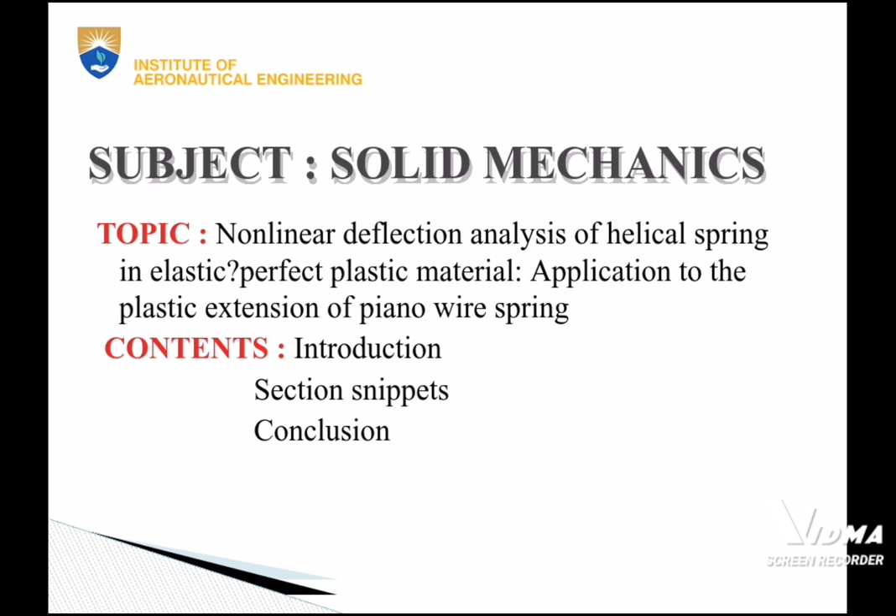2295580314. My tech talk is based on solid mechanics and my topic is non-linear deflection analysis of helical springs in elastic-perfect plastic materials: application to plastic extensions of piano wire springs. Introduction.

Flexibility is sometimes needed, and the springs are designed to fit the designer's needs for carrying load with elastic deflection displacement. The slope of the linear load-deflection relation is given by the conventional formula for spring constant k equals G d^4 / 8 D^3 n, where small d and capital D are wire and coil diameters, n the number of turns, G the shear modulus.

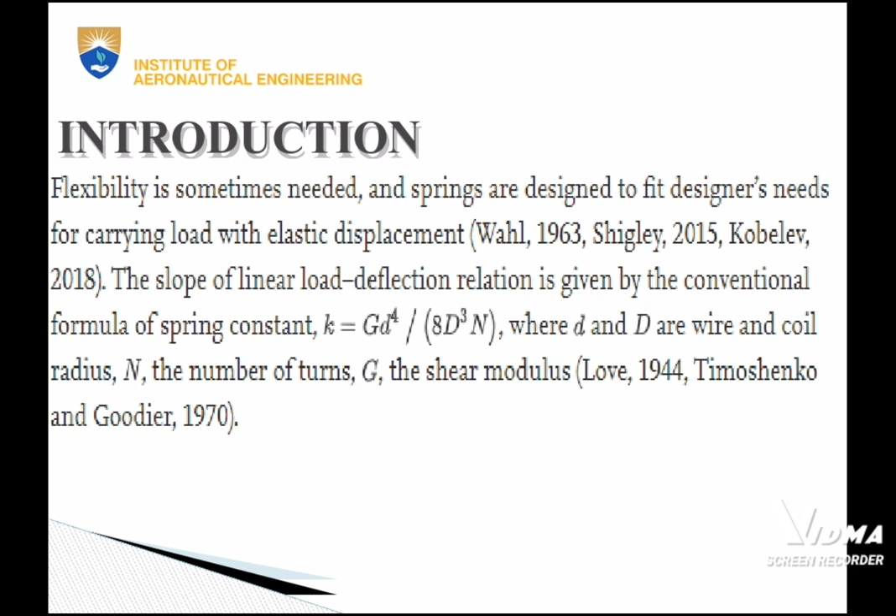Non-linearity would appear in load-deflection relations of helical springs when the deflection becomes large. One origin is the geometrical non-linearity, which is termed the pitch angle effect. In classical work, note that the above spring constant is obtained by considering only the torsion of spring elements due to external load. The approximation may be correct for small deflection of closely pitched springs.

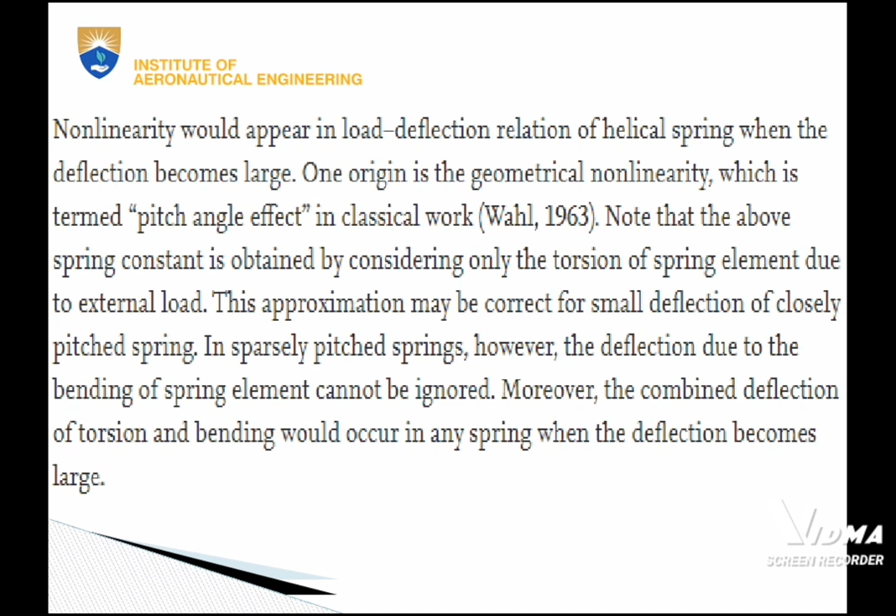For sparsely pitched springs, however, the deflection due to the bending of spring elements cannot be ignored. Moreover, the combined deflections of torsion and bending would occur in any springs when the deflection becomes large. Another geometrical nonlinearity comes from the rotation of a free end under load.

The free rotation has been known to occur, and the elastic analysis was given when the end of a spring is fixed not to rotate, and a certain amount of torque should be subjected to the end. The magnitude of the torque increases with increasing deflection of the spring. The present study considered the end free to rotate in order to simplify the boundary conditions of the analysis.

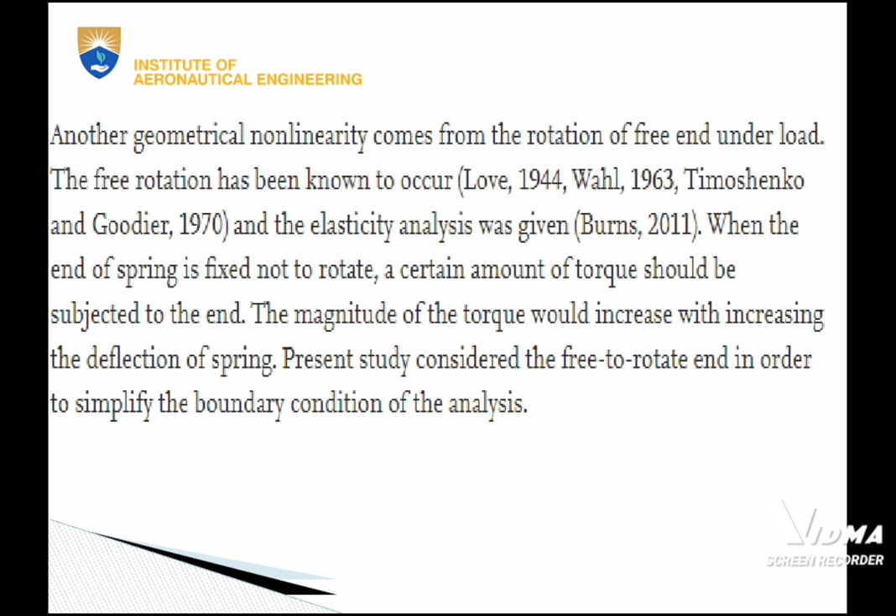The other origin is the material non-linearity due to plasticity in metals and alloys. The plasticity of springs is practically used in cold setting operations, and previous studies were considered within the elastic limit. The present study shall derive the load-deflection relations in the plastic range.

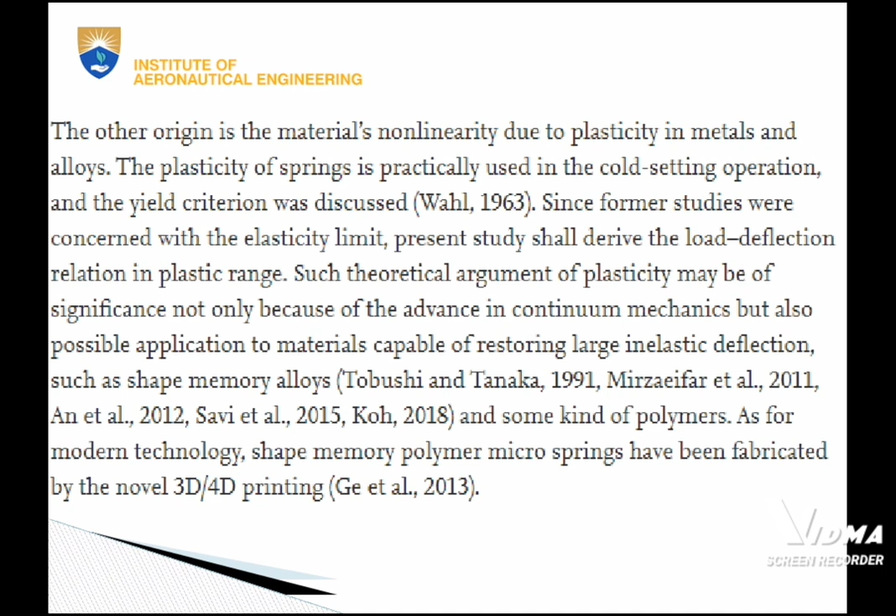Such theoretical treatment of plasticity may be of significance not only because of the advance in continuum mechanics but also possible applications to materials capable of restoring large inelastic deflections, such as shape memory alloys and some kinds of polymers. As for modern technology, shape memory polymer micro springs have been fabricated by novel 3D or 4D printing.

This study examines plasticity under the approximation of, first, no curvature effect in the assumption of large spring index, which is the ratio of spring radius to element wire radius, and second, the elastic perfect plastic material. These are for developing a formula.

The formula was applied to non-linear load-deflection curves in plastically extended helical springs made of piano wires. It is because the wire, after appropriate heat treatment, is deformed plastically with a small work hardening rate, which may be close to the elastic perfect plastic one.

In principle, any realistic material can be handled by numerical computations. The present theory may work for giving more perspective to understand the nonlinear phenomena.

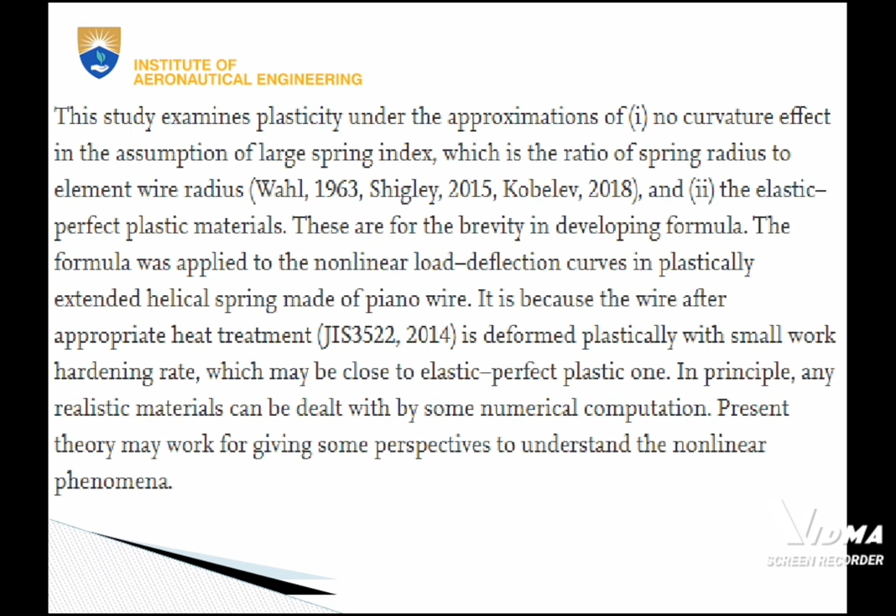Section: symbols and units. R, D: spring radius and diameter in mm. R0, D0: initial coil radius and diameter in mm. Rho: radius of curvature of element in mm. d: element diameter in mm. N: number of turns. L: length of helical element per turn before deflection.

Delta: deflection per turn in mm. Phi: angle per turn around spring axis in rad or deg. P: load on a spring in N. T: torsion moment in N mm. M: bending moment in N mm. Alpha: pitch angle in rad. Tau0: shear stress.

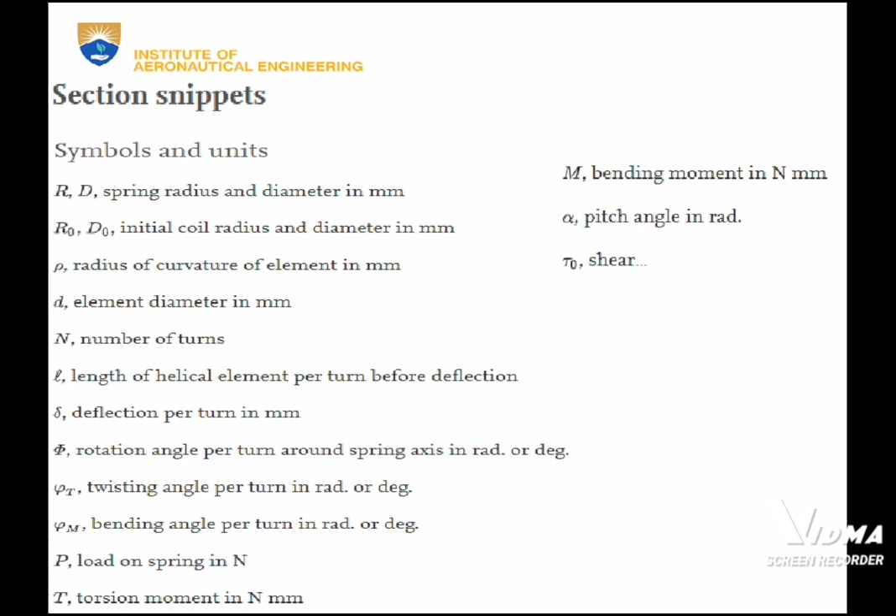The helix line with the pitch angle alpha in the rectangular O-x1 x2 x3 coordinates is x1 equals r cos theta, x2 equals r sin theta, x3 equals r theta tan alpha. Since the length of the element is d theta,

Materials and methods. The piano wire SWP-A grade of JIS, of diameter 0.5 mm, was used. The straight wire was annealed at 350 degrees Celsius and was tensile tested at room temperature with an Instron-type testing machine.

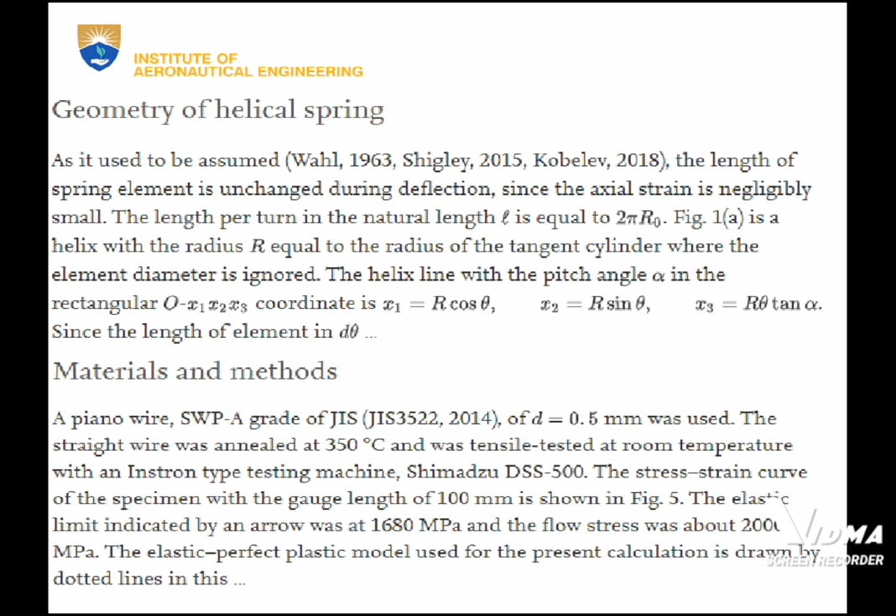Shimadzu DSS 500. The stress-strain curve of the specimen with a gauge length of 100 mm is shown in figure 5. The elastic limit, indicated by an arrow, was at 1680 MPa, and the flow stress was about 2000 MPa. The elastic perfect plastic model for the present calculation is drawn by the dotted line.

Deflection of piano wire springs. Load weight was subjected incrementally to springs, as illustrated in figure 6. One end of the spring was fixed to a rigid bar, and the other was clipped to the cage, which can carry a few pieces of weight. As weight was added to the cage, the displacement of the cage and its rotating angle were measured simultaneously.

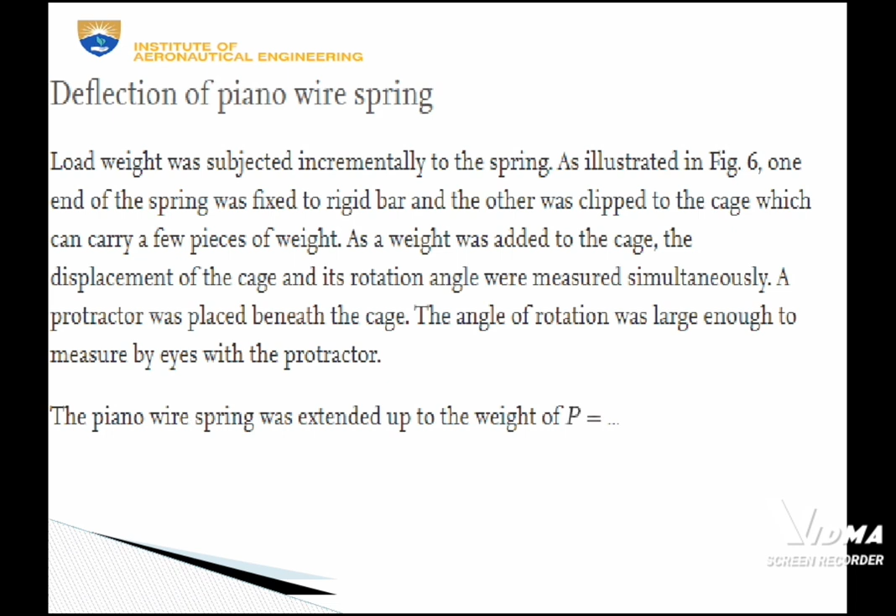A protractor was placed beneath the cage. The angle of rotation was large enough to measure by eye with a protractor. The piano wire spring was extended up to the weight of P.

Conclusion. The nonlinear load carrying capacity of helical springs made of elastic perfect plastic material was examined. A mechanics of materials theory was provided by accounting for the combined state of torsion and bending in plasticity under the approximation of large spring index.

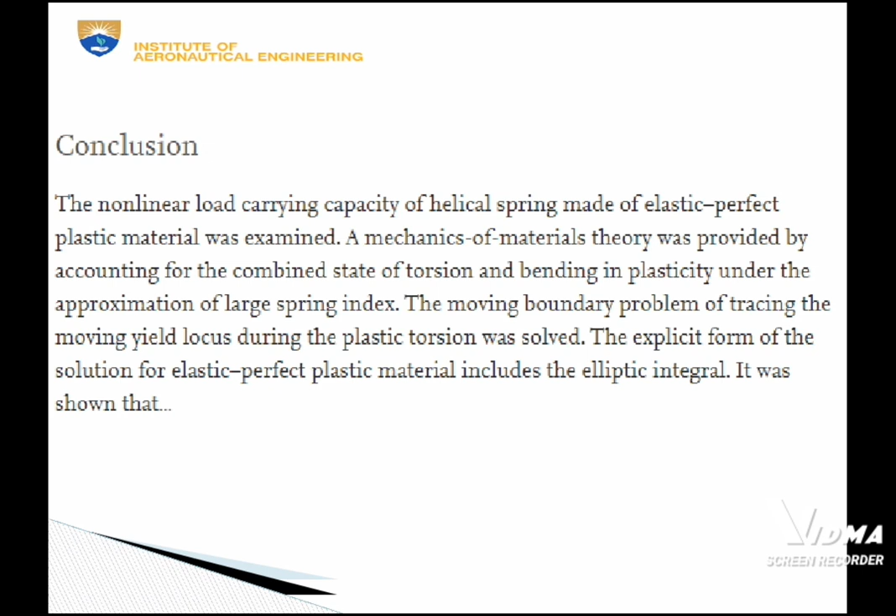The moving boundary problem for tracing the moving yield locus during the plastic torsion was solved. The explicit solutions for elastic perfect plastic material include the elliptic integral. It was shown that. Thank you.